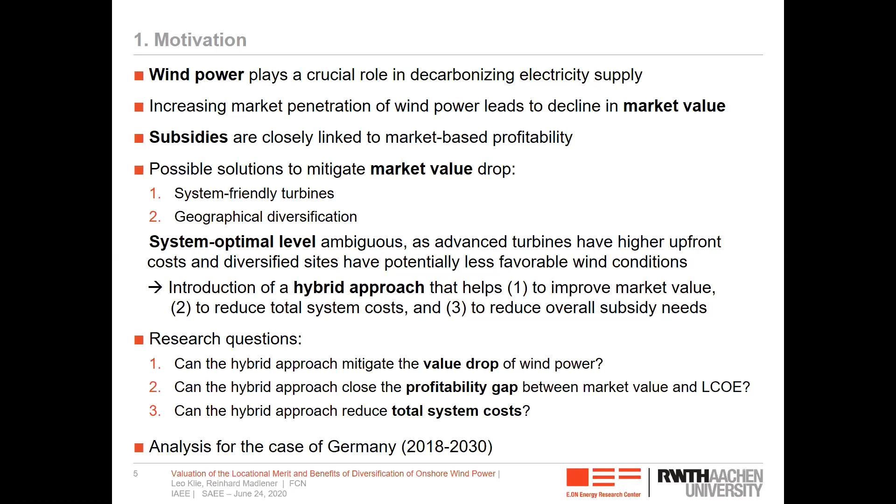We did the analysis for the case of Germany over a time horizon from 2018 to 2030. What's the advantageousness of the hybrid approach? Can this be expected to depend on both the country's wind and power system characteristics? Yes—so it's not just the wind conditions, it's the entire power system that needs to be modeled and understood.

There is a bunch of related literature. It has been growing over the last years, and I hope that some in the audience see their papers included. I did not have enough space to list them all, but in our article we made a detailed review of the current state of the art, identifying the gaps and also our original contribution to the literature.

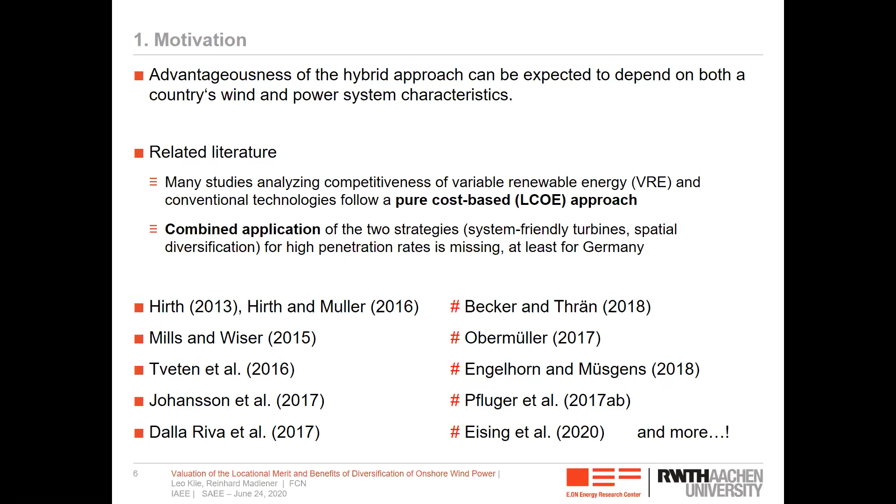Just two aspects: many of the studies we reviewed analyzed the competitiveness of variable renewable energies and conventional technologies by following just a cost-based or levelized cost of electricity approach. Others combined two strategies, system-friendly turbines and spatial diversification, but not at penetration rates as high as ours, since we look up to rates of 65%. For Germany, such a study was, in our view, missing so far.

Here is a map of Germany, or three of them, showing what we did. The first map shows the total system costs and market value development with high penetration rates of up to 65%—that's the goal of the German government for 2030 for the business-as-usual case, i.e. if we extrapolate recent trends into the future and see what happens.

We compare that with our hybrid strategy, where we take system-friendly technology into account and also geographic diversification. We split up the country into 38 regions—NUTS-2 classification regions—and then did a more detailed analysis on four regions that looked most promising in terms of geographical diversification.

We compare our outcome from the hybrid approach versus the business-as-usual scenario that we also determined. We look at the difference, BAU minus DIV for diversification, and we also checked some sensitivities and analyses in more isolation to check what additional benefit really comes from diversification and how much benefit we see from system-friendly turbine configurations.

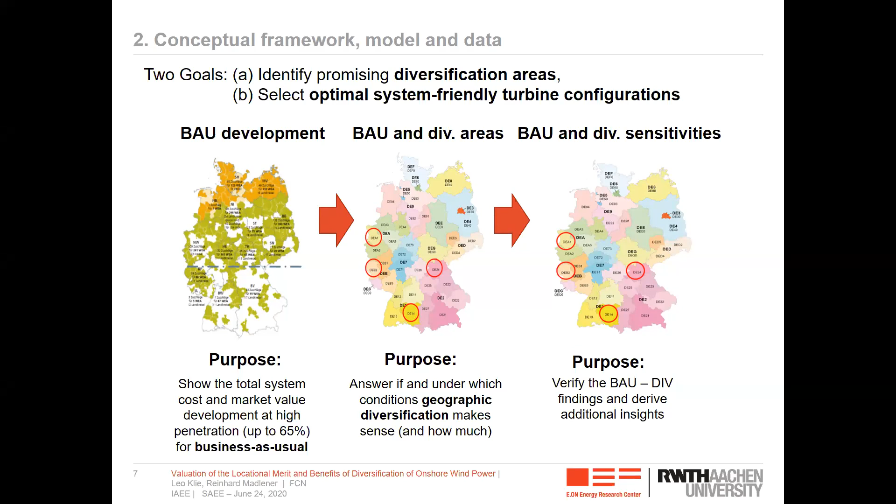Now this is an overview of the model architecture. In the middle you see EMMA, the electricity market model developed by Lion Hirth—and for most of you, Lion will be a well-known figure. This model is open source, so anybody could ask for permission to use it and modify it.

This model was used to derive the market values as well as the total system costs. As inputs, we had to deal with the configuration-specific costs, the region and configuration-specific energy model, and hourly wholesale electricity prices. We determined variance reduction potentials, the region and configuration-specific LCOE, and the region and configuration-specific market values.

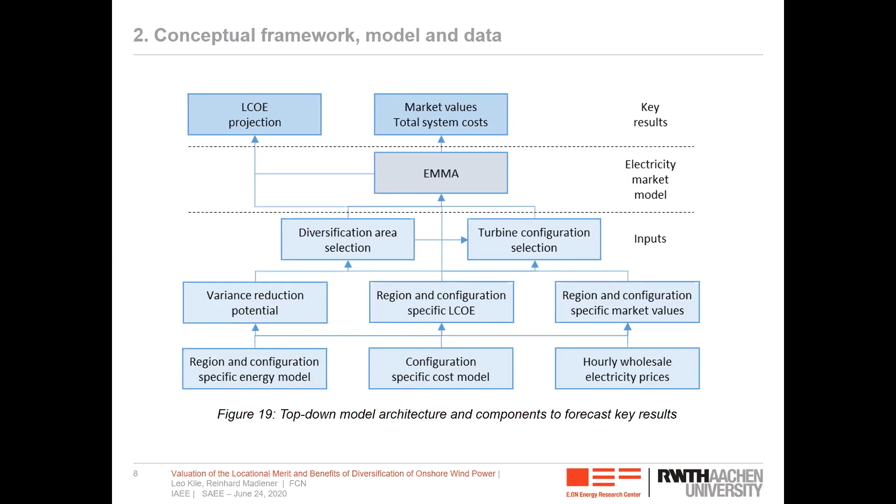These fed into the diversification area selection I showed you on the previous slide, and the turbine configuration selection, which was more of a technical exercise that I will come to in a minute.

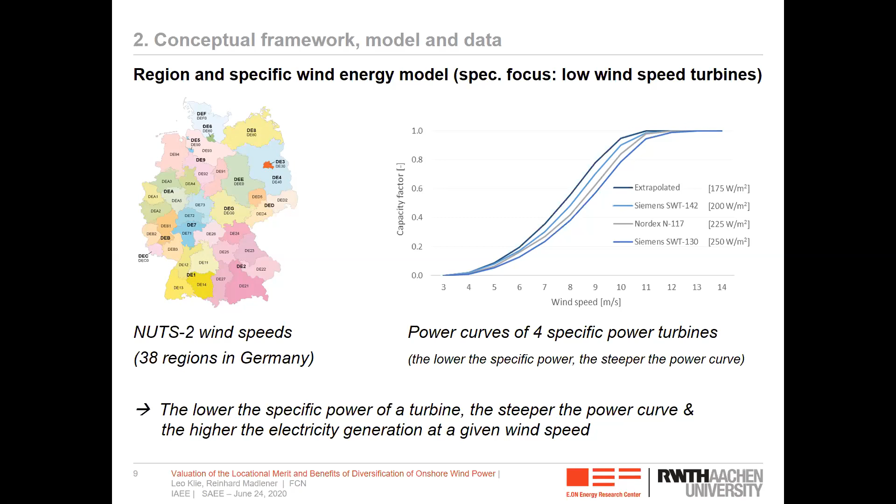Here on the right-hand side you see the power curves of four different specific-power turbines, which allowed us to decide which turbine technology to use in our analysis. For some turbines this curve is steeper, meaning they can have a higher capacity factor for the same wind speed. On the left-hand side, you see again the map of Germany with the 38 regions based on the NUTS 2 wind speed classification.

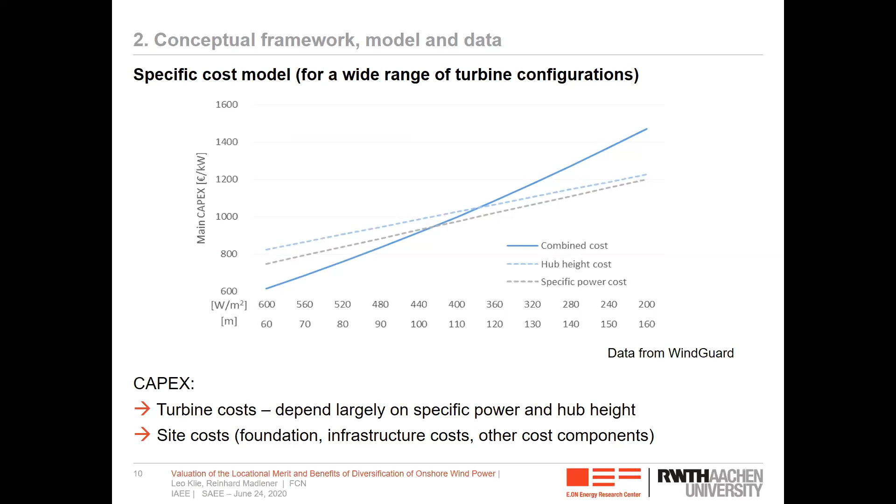Now, in terms of OPEX, CAPEX, capital expenditures and operating expenditures, we also had to look into this to do the cost analysis. You can see here for different hub heights and different specific power in watts per square meter that the cost increases as the turbine height or the specific power decreases. You can combine the two and get the solid blue line compared to the dashed lines. In terms of CAPEX, the turbine costs depend a lot on the specific power and hub height, so that's a major influencing factor.

But there are also site costs like foundation and infrastructure costs, and other cost components that need to be appropriately taken into account. Then we looked at the diversification area selection, and this is just a schematic diagram showing roughly how we did it. I don't have much time to go into details, but all these details are documented in the working paper.

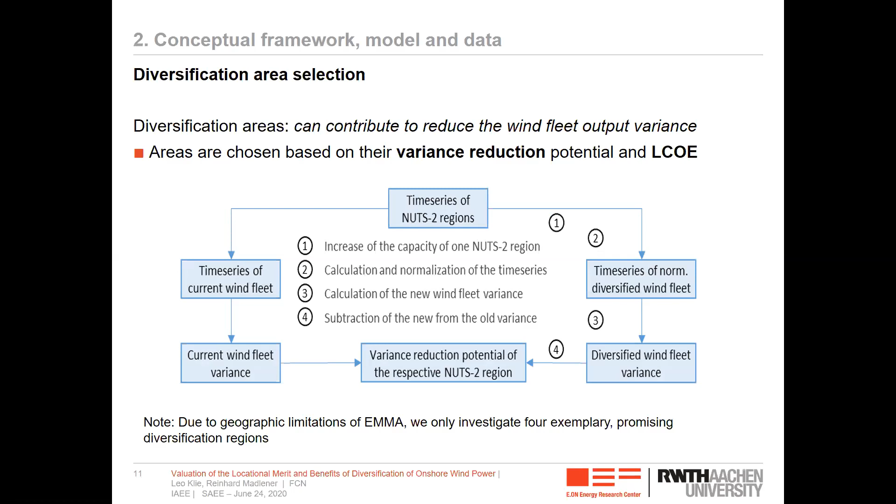Available next week. We chose the areas based not just on the variance reduction of the wind power output, but also on the levelized cost of electricity. Because of geographic limitations of EMMA, we only investigated 4 exemplary promising diversification regions in the end.

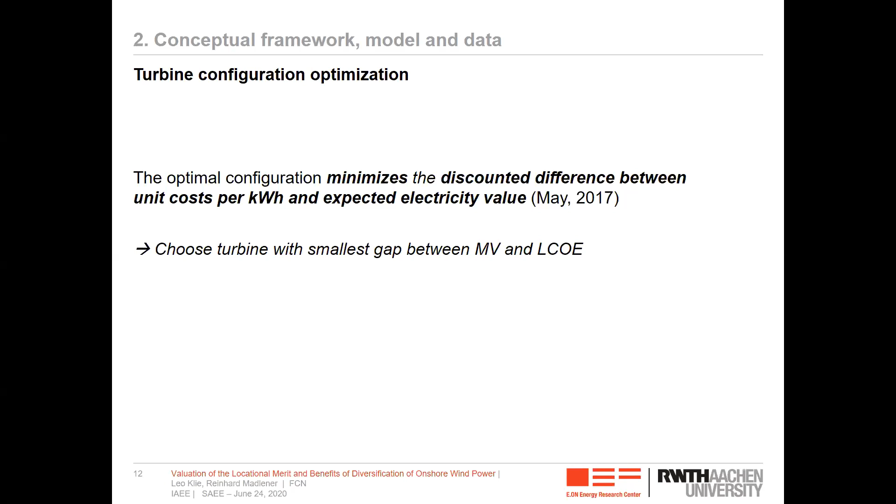Now, the turbine configuration optimization was based on the discounted difference between the unit cost per kilowatt hour and the expected electricity value, following also the work by May published in 2017. We look at turbines to be chosen with the smallest gap between market value and the levelized cost of electricity, kind of the most profitable ones.

Regarding the current and future wind fleets, we had to look into the benefits of our approach by assessing and comparing it with business-as-usual turbines. This is in terms of the wind power plants and turbines installed today, but also into the future up to 2030.

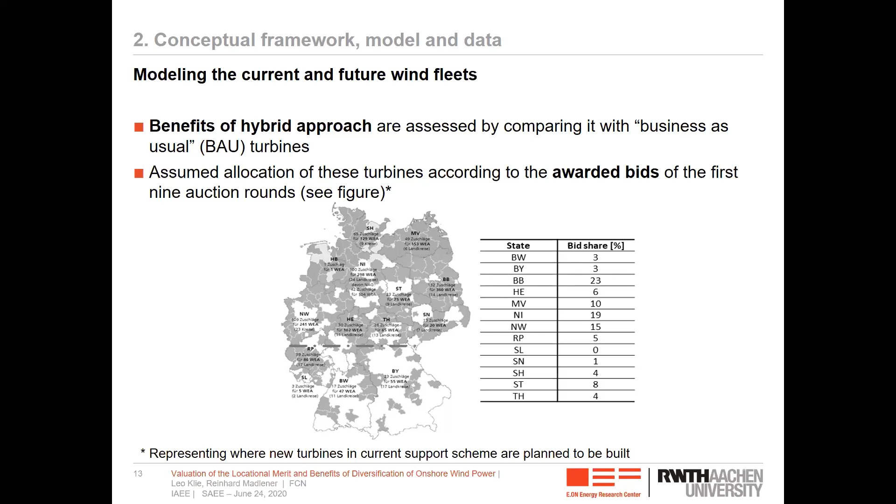The assumption was to allocate the turbines according to the awarded bids of the 9 auction rounds we had in the recent past. The idea is representing where the new turbines in the current support scheme under current market conditions are planned to be built, to be quite realistic about where the next turbines will be installed in the years to come.

Then we move on to the EMMA model, the European Electricity Market Model, which we adapted in several ways. For example, we included the 4 diversification regions I already showed on the map. We also implemented offshore wind technologies, and represented technologies for the future and current wind fleet, which was not in EMMA per se.

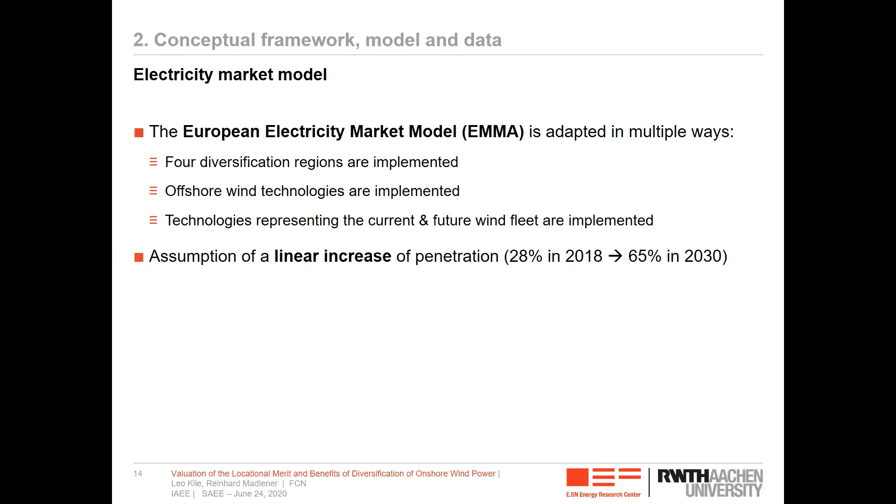There is an assumption of a linear increase of penetration from 28 to 65%. The linearity is an assumption that has an impact on the results, but we found this quite convenient and simple enough to use.

We also had some more data like the CO2 price, which you can see here, from 24 euros per ton up to 35 euros in 2030. Nuclear phase-out as decided in Germany until 2022. And the linear coal phase-out assumption until 2038, which is the law that says either by 2038 or maybe earlier, 2035, coal should be phased out in Germany.

Nuclear and coal phase-out has tremendous implications on the power supply and the market in Germany, so this all has to be appropriately taken into account. We also assumed some technical potential based on the literature for advanced wind turbines in Germany, and this comes up to 620 gigawatts overall.

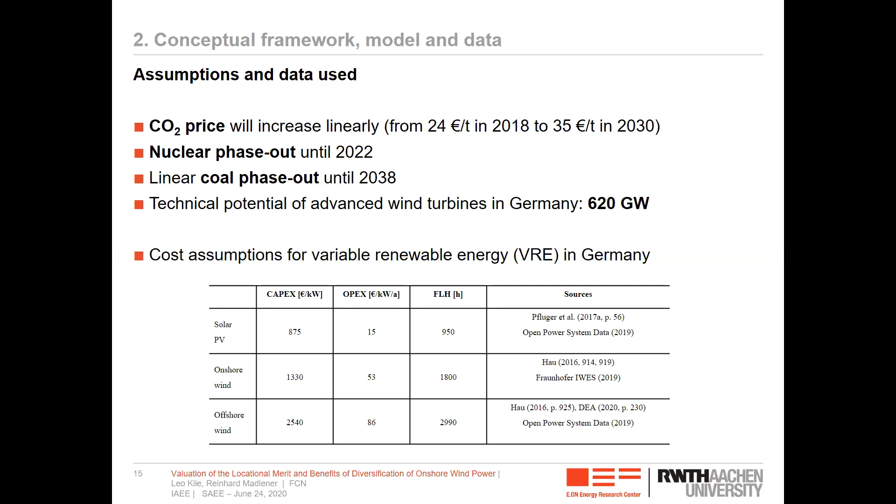For the cost assumptions, you see some sources at the bottom, but I'll skip that for now. Of course, you can also have the PowerPoint slides later made available from us.

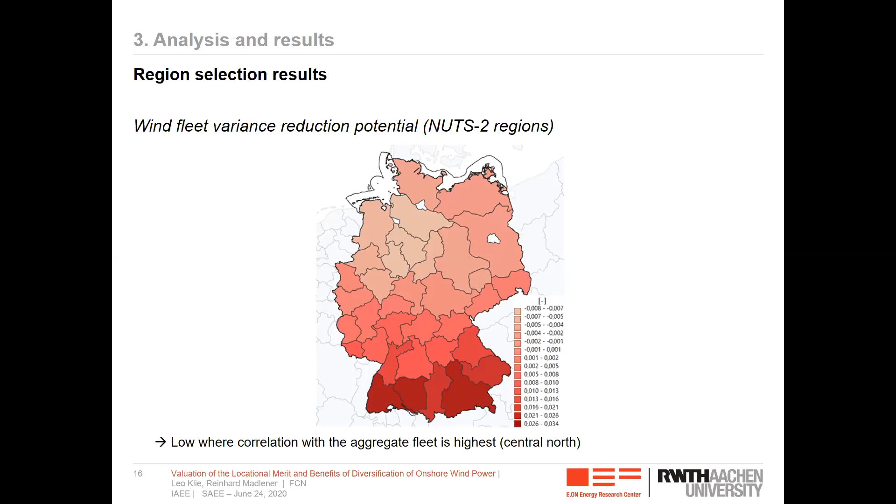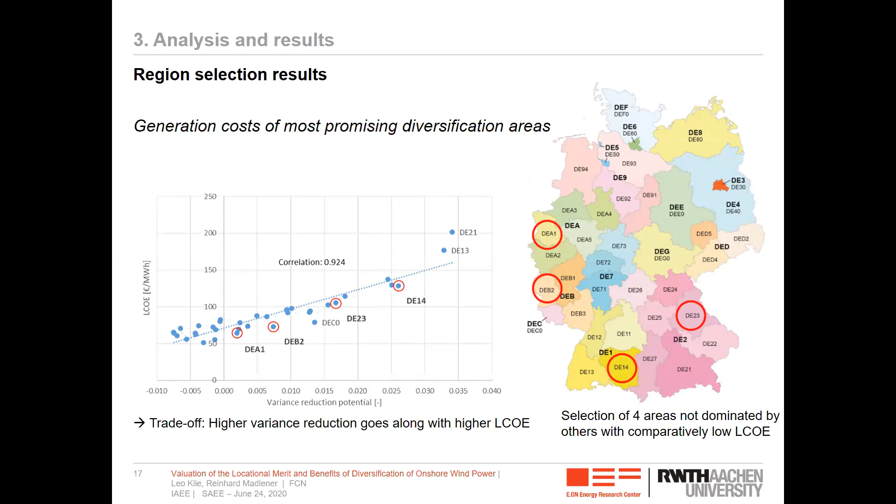Important to mention is also the trade-off: there is a trade-off between the higher variance reduction, which goes along with higher LCOE, as you can see from the left graph shown here. On the right-hand graph, you see again these 4 selected areas, which were the most promising ones in terms of diversification, but also with an eye on the LCOE.

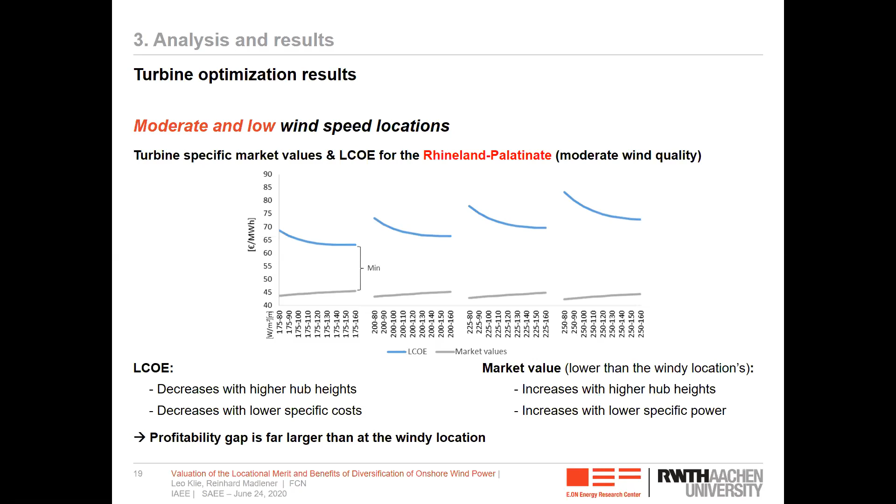Now, in comparison, this is the situation for moderate and low wind speed locations, for example in Rhineland-Palatinate, where we see, in contrast to the previous result, that LCOE decreases with higher hub heights. The other results are more or less the same as before: it decreases with lower specific power, whereas the market value increases with higher hub heights and also increases with lower specific power. You see the minimum shown in this slide: a hub height of 160 meters and a specific power of the turbine of 175 watts per square meter. And just to flip back again, the minimum there was for hub heights of 90 meters, again with a specific power of 175 watts per square meter.

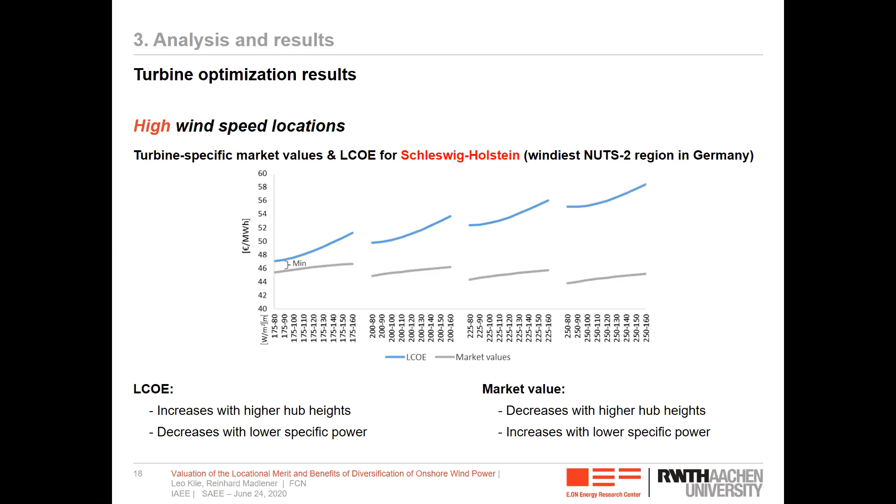For the conclusions from these optimal turbine configurations, we can say that lower specific power, which is system friendliness, is always better. Low hub heights are optimal for high wind speed locations, and high hub heights are better for moderate and low wind speed locations.

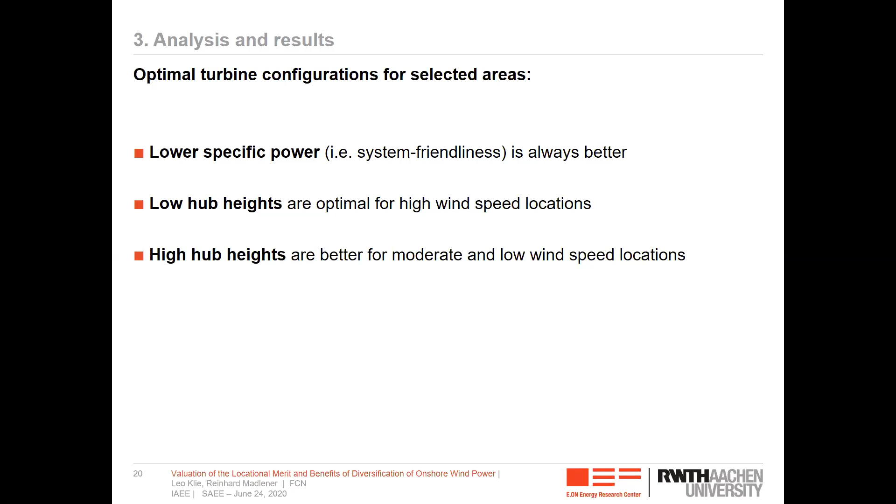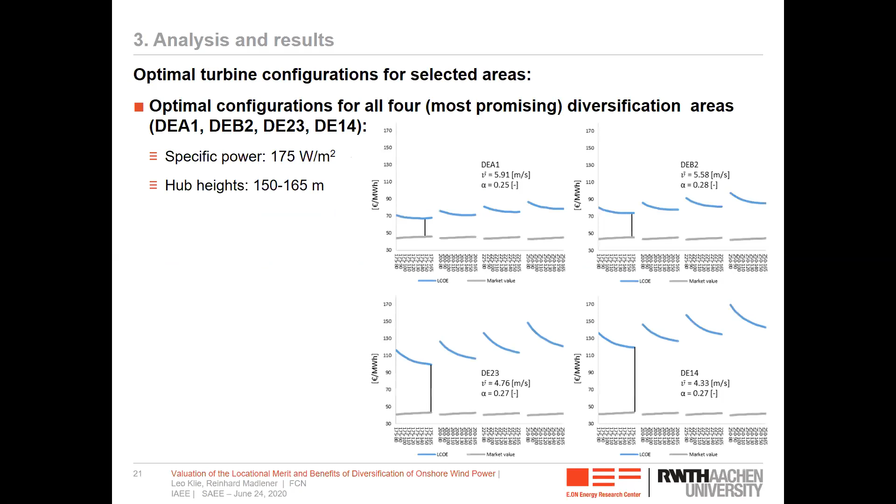Next I'll show you, for the 4 selected areas, the optimal configurations. It's a bit hard to see, especially since the numbers are small printed, but by and large we find the optimum for relatively low specific power and hub heights of about 150 to 165 meters.

Here you see the application of the hybrid approach and how much this really gives you in terms of the profitability gap. This can be most easily seen: there is a significant difference of about 0.75 billion euros per annum, which is equivalent to a 5% reduction in the overall subsidy needs compared to business as usual. We also find a reduction, so the hybrid approach really seems to be better, or slightly better, in most of these indicators that we looked at.

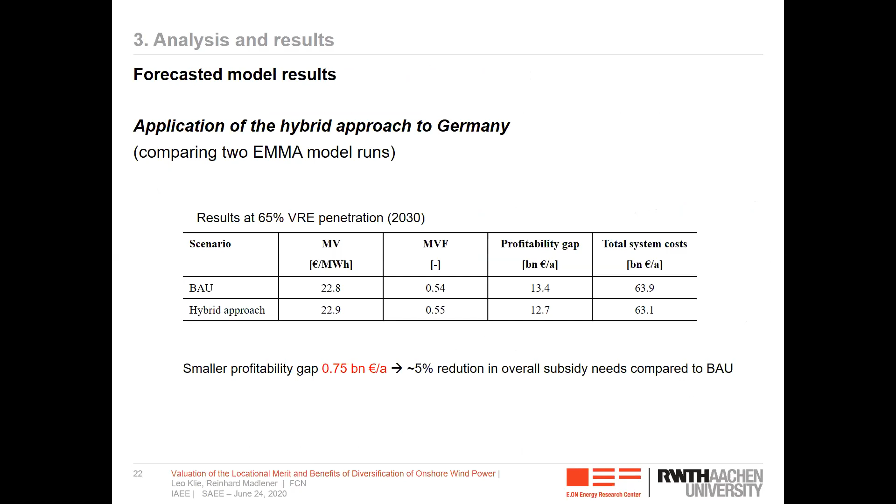Next, the market value. Using the hybrid approach, we get higher market values compared to the business-as-usual additions, as you can see from this slide. On the x-axis we have the increase in variable renewables, which also includes offshore wind and solar power. We do our analysis only for onshore wind, and we study this up to 65% renewables penetration. You can see the differences: 1 to 2 euros per megawatt hour at the 30% level of today, versus 2 to 7 euros per megawatt hour at the 65% level of penetration.

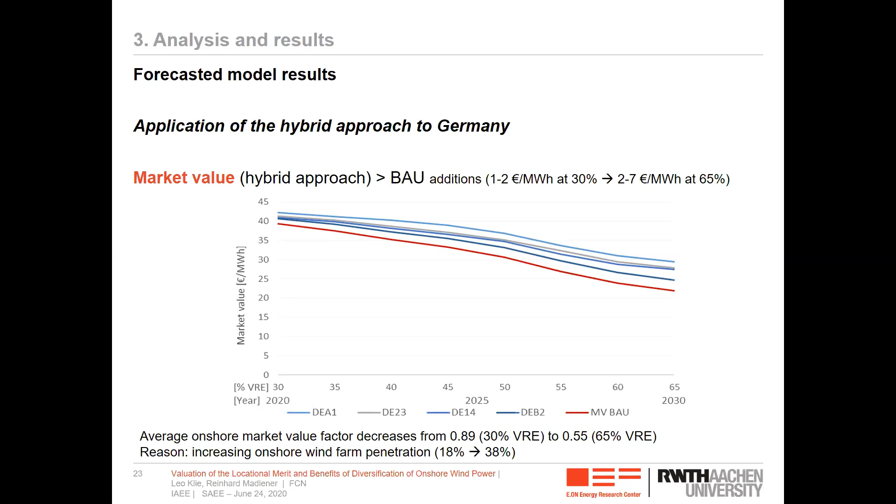One reason for this result is the increasing onshore wind farm penetration, which rises over the model horizon from 18% to 38%. In terms of profitability gaps for the hybrid approach, you can see the results here for the regions we covered versus business as usual. Some observations include that the profitability gap increases, and if we have... the reason is the decrease in the market value.

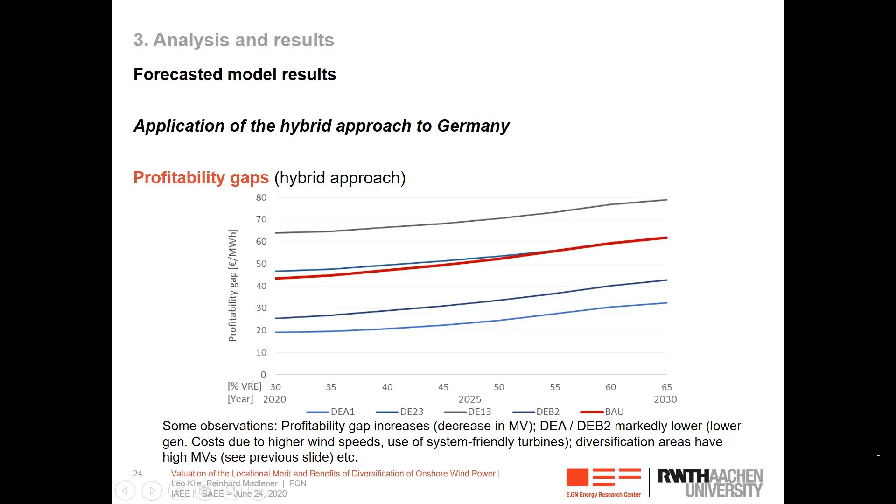We find that the two regions, DEA and DEB2, are markedly lower in terms of the profitability gap. The reason is that generation costs are lower because we have higher wind speeds in those two regions versus the other two regions covered, but also there's a higher use of system-friendly turbines in those two regions. The diversification areas have high market values, which was already evident from the previous slide.

Next, the profitability gaps for DEA1 region, at various penetration rates plus learning rates. So we also look at different learning rates, shown at the bottom from 0 to 60%. At some point there is a learning rate level where the profitability gap becomes actually wider or higher, versus the other situation where we are able to reduce the profitability gap. So learning plays a big role, but so does the penetration of renewables over time.

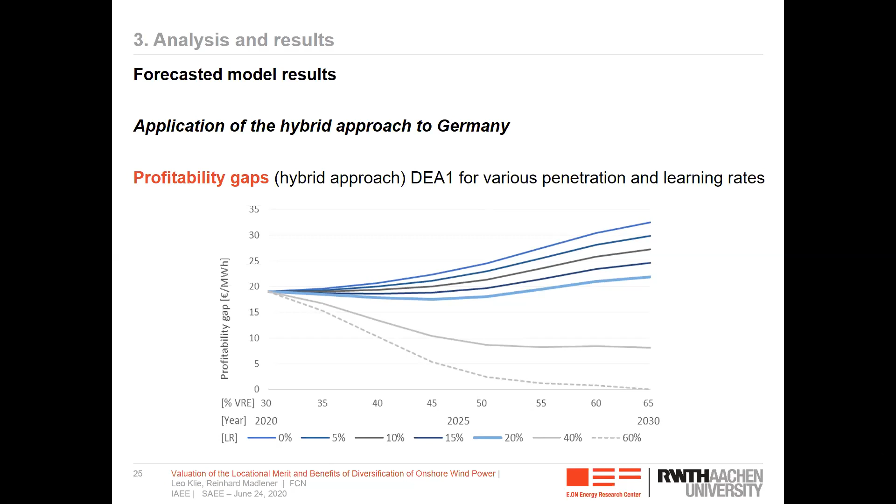That's why the benefit doesn't continue like that. Over the model period, the total systems costs of the hybrid approach model are definitely lower than for the business as usual. The cost reductions increase steeply up to 40% and then decline after that in percentage. But in absolute terms, it slightly increases further all the way to 65%.

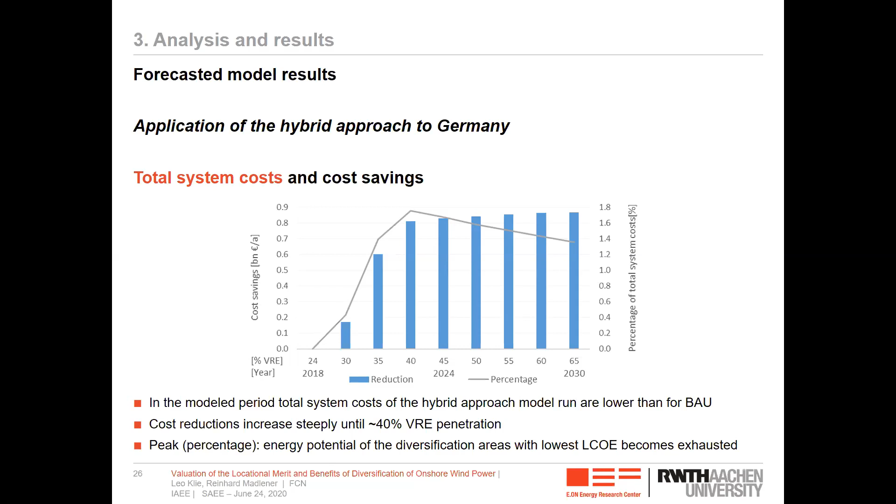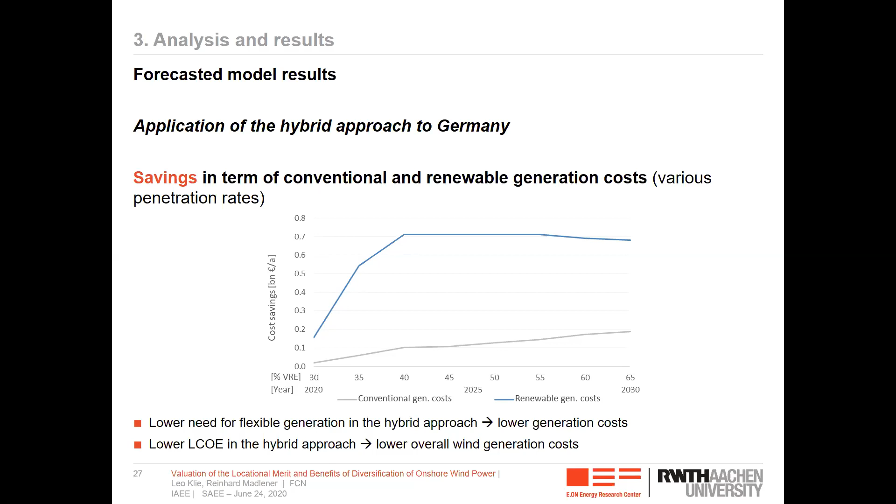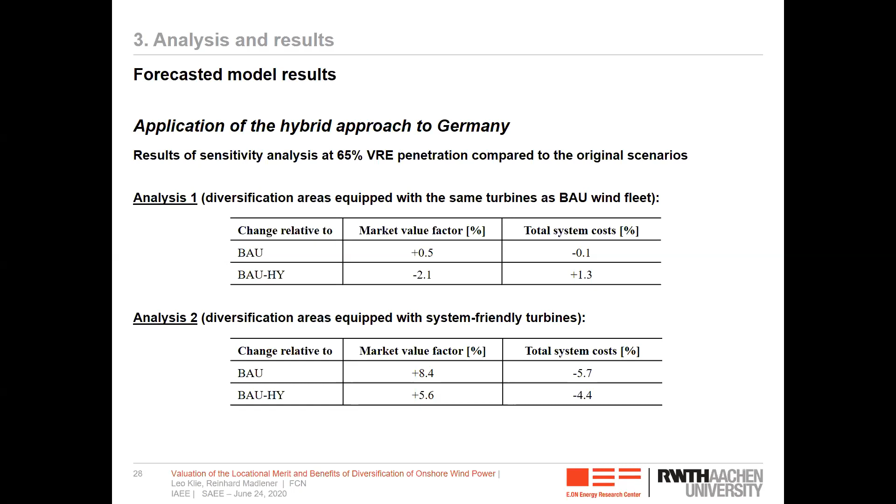To compare some sensitivity analysis we did between the business as usual and business as usual with the hybrid approach combined, we can see that this doesn't lead to much improvement as we would expect. But here we try to single out the diversification effect per se, and we find that this is really not the big story. It's more the system-friendly turbines.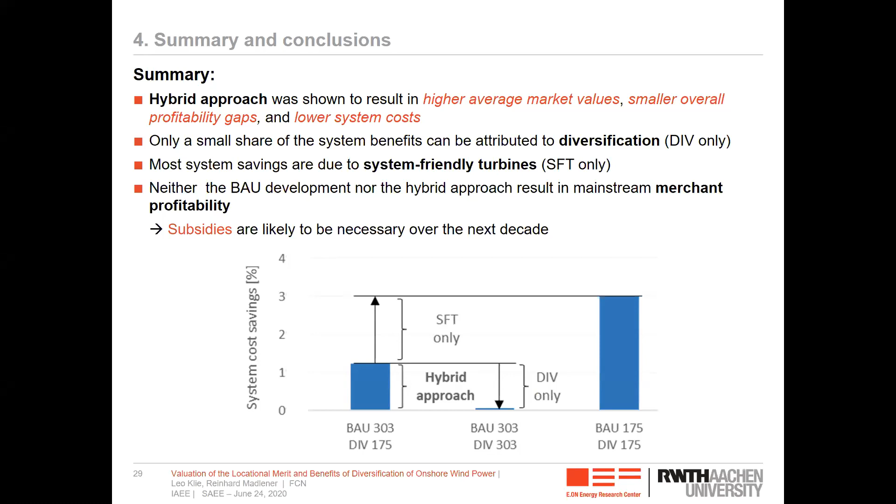And neither the business as usual development nor the hybrid approach result in mainstream merchant profitability, which means subsidies are likely to be necessary for the foreseeable future. Diversification is not the main issue, but system-friendly turbines should definitely be taken into consideration.

To conclude, for the selected diversification areas, if equipped with system-friendly turbines, the market value drop is less severe. You can read the numbers yourself. The profitability gap, i.e. the subsidy need, in diversification areas increases more slowly, and the total system costs decrease by about 0.85 billion euros per year, or 1.4% of the total system costs at a 65% renewables penetration.

A large share of the benefits is attributed to system-friendly turbines and a low share to geographical diversification. The profitability, measured by market value minus levelized cost of electricity, can be increased by system-friendly turbines at both the current and the future penetration rates. Some diversified locations can become increasingly profitable at higher penetration rates.

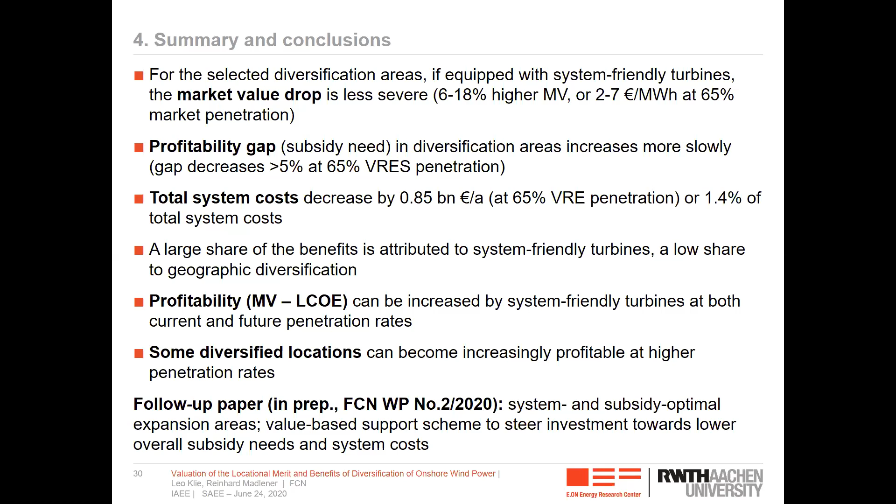And last but not least, I point out the follow-up paper that is currently under preparation, where we also want to look at the system and subsidy optimal expansion areas, and a value-based support scheme that could actually steer investment towards lower overall subsidy needs and system costs. Well, that concludes my presentation. Thank you for your attention. If you have any questions, I will look now into the question and answer section. As I said, this paper will be available sometime next week.

So I see 3 questions there. How do you treat exports and curtailment? I'm sure some of these questions I cannot answer you right away. David, I'm sorry, I will have to check to be sure. But this was not a specific element. So I take it either we did it as it is done in EMA. We did not change anything to that, but I need to check how exactly it is done in EMA.

The second question, the obvious question this presentation raises is transmission costs. Yes, we also looked at those. I don't have the figure at hand, but they can be found in the paper. As we looked at all the different costs to balance off this volatility in supply, the cost savings in terms of transmission costs were actually accounted for.

And hang on, the third question: does the modeling cover the transmission and distribution of electricity? What software was used in the sensitivity analysis? That question I cannot answer right away. For the sensitivity analysis, we more or less made some changes, as I explained, with this isolation of the diversification to see whether and how the results change. But otherwise, software-wise, I need to really consult Leo to make sure I give you the proper answer.

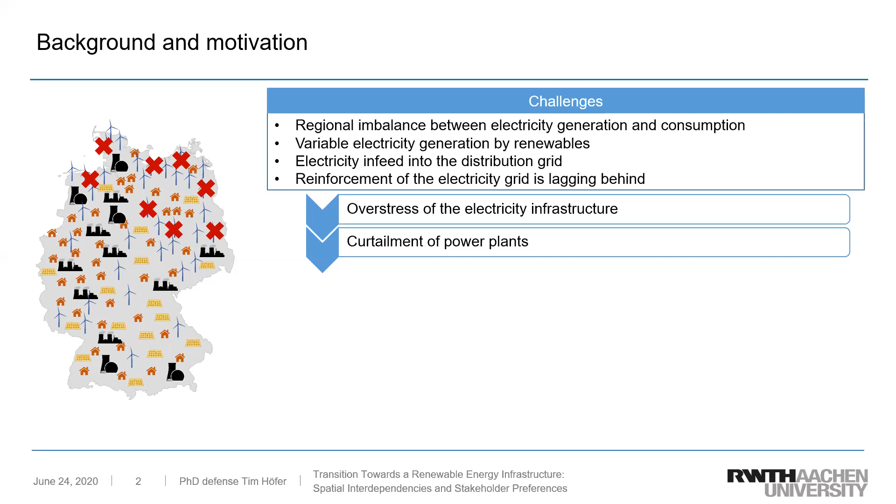So in the short term, to resolve this overstress, the system operators curtail power plants. In the first step, they curtail conventional power plants, but if this is not enough, they have to reduce the output of renewable power plants as well.

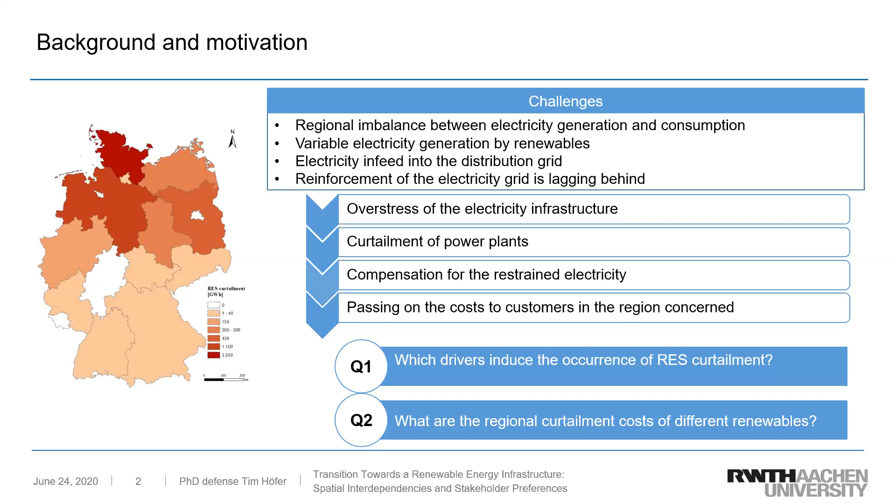First, which drivers induce the occurrence of RES curtailment, so the reduction of the output of renewables? And what are the regional curtailment costs of different renewables?

So as I mentioned, this study focuses on Germany. And within Germany, we selected four distribution system operators, which cover approximately 40% of the German area and are responsible for the majority of RES curtailment. These distribution system operators have different characteristics, like they feature wind-dominated, PV-dominated, or low-load regions. And we analyzed three years from 2015 to 2017.

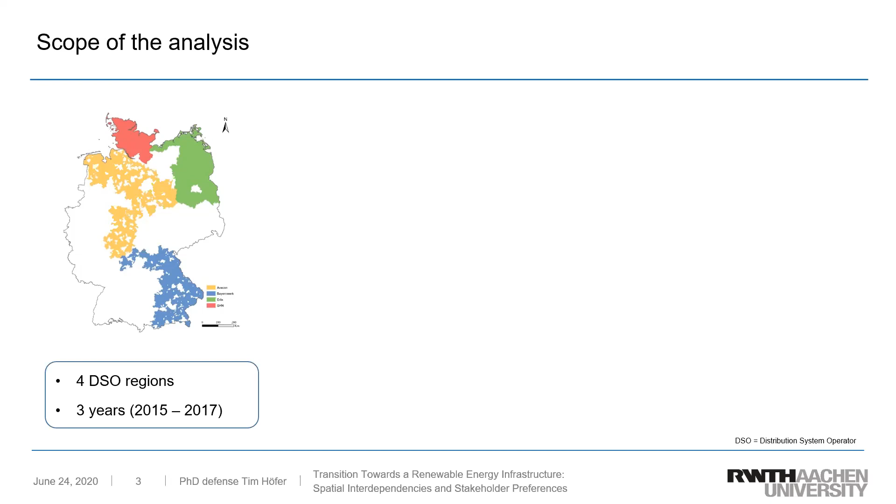And then to further refine our analysis, we divided the distribution system operator regions into smaller subregions. We did that with a Voronoi tessellation. In a Voronoi tessellation, polygons are created around seeds, and then the points, for example the power plants, are allocated to the closest polygon.

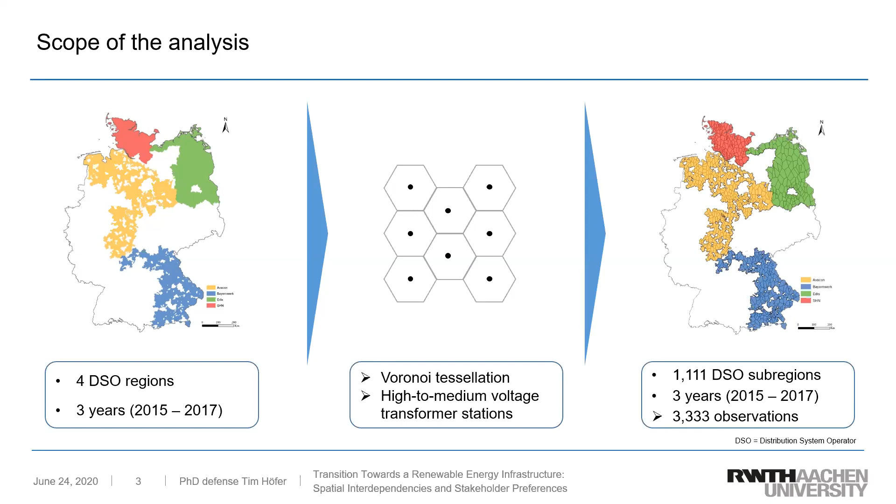And as seeds, we use the high to medium voltage level transformer stations. So with this, we get 1,111 DSO subregions within these 4 DSO regions. We cover 3 years, so this yields a spatial panel data set of 3,333 observations.

For our regression analysis, we use a 2-step Heckit sample selection model. The first step is the so-called selection equation, and the second step is the output equation. The selection equation is a probit model which corrects bias from non-randomly selected samples.

Here the dependent variable, the RES curtailment costs, is binary - either a curtailment occurred in a year and in a DSO subregion or not. All subregions, all 1,111 subregions, are considered. This selection equation analyzes the impact of renewables on the probability of occurrence of RES curtailment.

To connect step 1 and step 2, we calculate the inverse Mills ratio and include it in the second step, to cover the bias from the non-randomly selected samples.

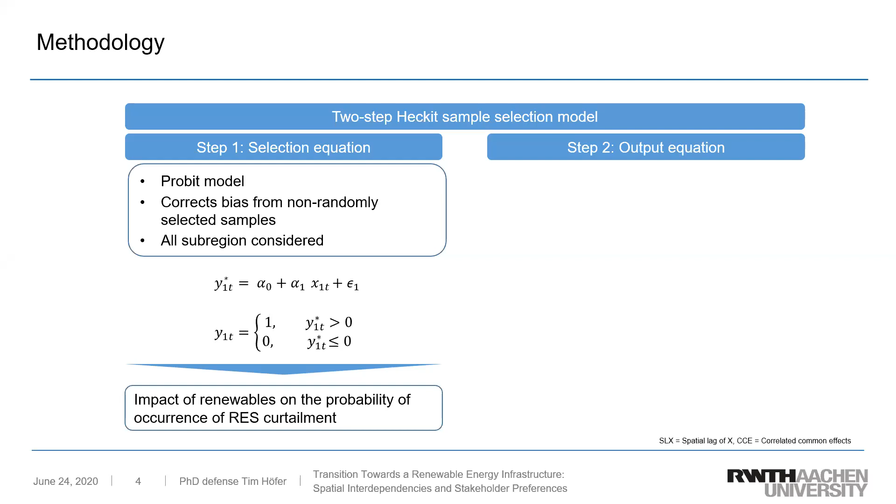The second step is a spatial econometric model, which captures cross-sectional dependence between neighboring regions. In this equation, we only consider those subregions which experienced curtailment of renewables in the 3 consecutive years from 2015 to 2017. In this linear regression, we included 2 different kinds of spatial models.

The first is the so-called spatial lag of X model. This model analyzes the impact of the explanatory variables on neighboring regions. And the common correlated effects model here is inserted in the error term and captures the cross-sectional dependence by cross-sectional averages across the subregions. With this spatial econometric model, we analyze the impacts of renewables on RES curtailment costs.

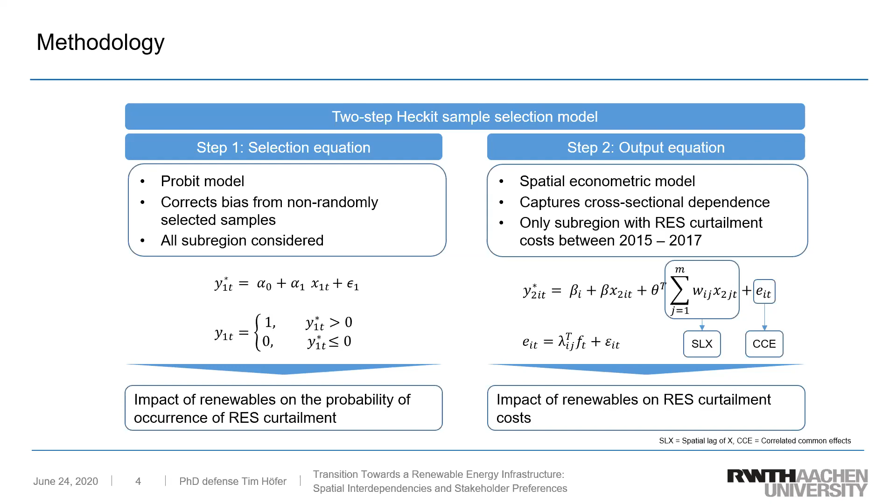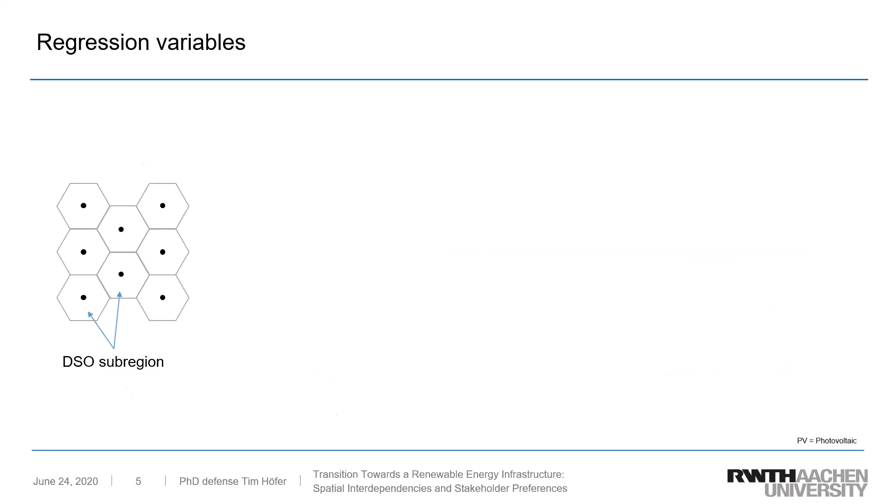For our regression analysis, we allocate all variables to the DSO subregions. Our dependent variable is the curtailment costs measured in euros. Then we have power plants like wind energy, PV system, bioenergy, hydro energy, and conventional power plants. But we only consider those power plants that are connected to the distribution grid.

And we analyze 2 different models. In the first model, we use the installed capacity of these power plants to explain the curtailment costs. And in the second model, we use the generated electricity to explain the curtailment costs.

Further explanatory variables are the load of a DSO subregion, the average wind speed, and then 2 dummy variables. The first is the distribution system operator responsible for the subregion, and then the year in which the curtailment costs or the curtailment occurred.

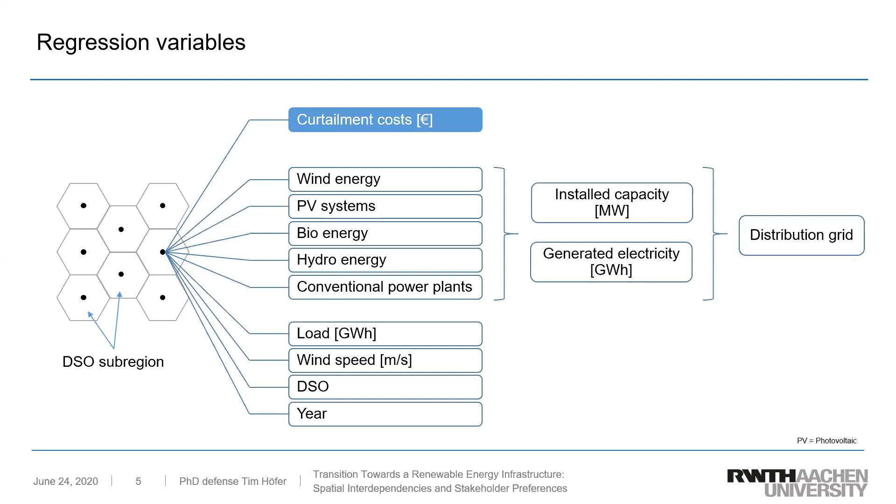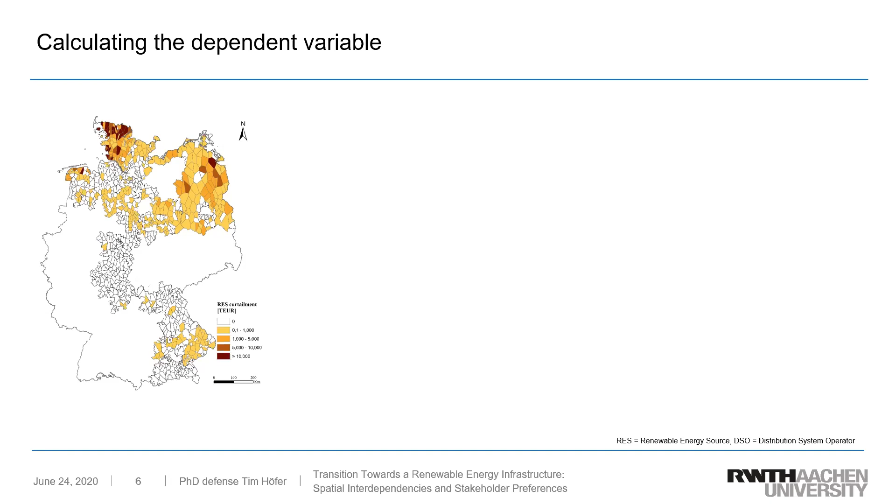Our dependent variable, the cost for curtailing renewable energy sources, is not publicly available, so we had to calculate this dependent variable ourselves. We did this in 3 steps.

The first step is to calculate the potential hourly output of renewables during the curtailment measure. So we used the MERRA-2 data of NASA, which publishes hourly wind speeds or solar irradiation, and use it to calculate the variable output of wind turbines or photovoltaic systems, for example.

Then the second step is to compute the reduced power output of renewables stemming from the curtailment measure. So if an overstress occurs, the system operator can choose to reduce the output of renewables to 60, 30, or 0% of the nameplate capacity. The potential output minus the reduction stage yields the reduced power output.

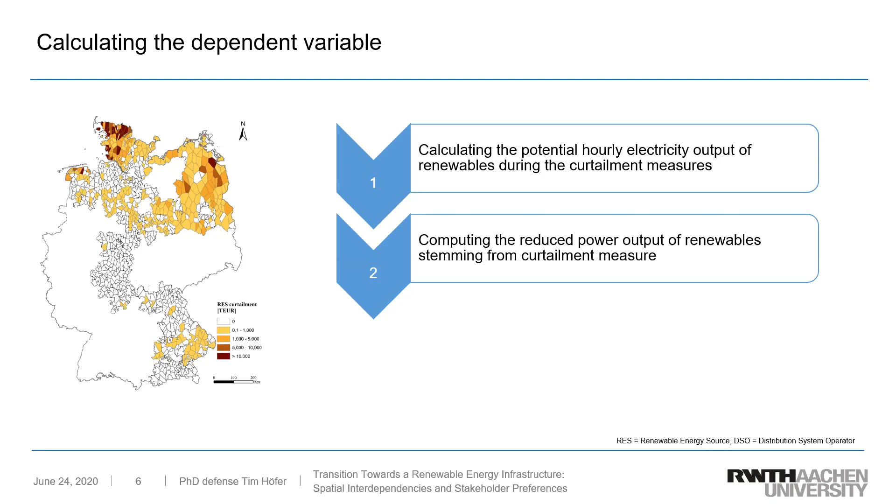Finally, we calculate the RES curtailment costs in the subregions by multiplying the reduced power output with the remuneration tariff of the renewable, and then summing all the costs up for the respective DSO subregions.

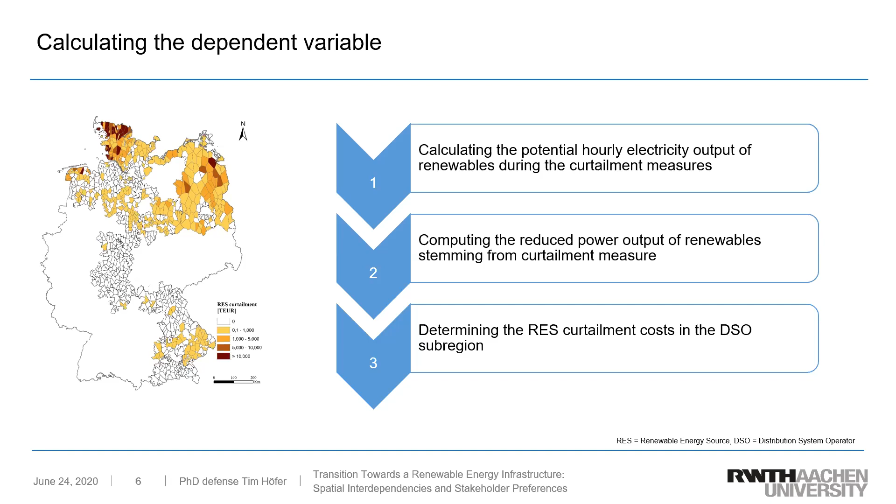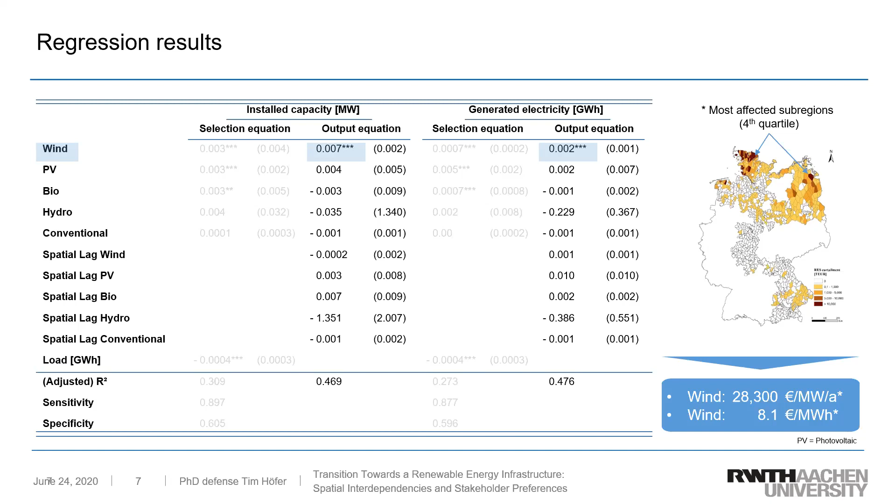We calculated how much an increase of 0.7% per megawatt or 0.2% per gigawatt hour would mean. As a result, we calculate that an additional installed capacity of wind energy increases the curtailment costs in a DSO subregion by 28,300 euros a year, approximately 2% of the installation costs of an average wind turbine. Furthermore, another megawatt hour of generated electricity induces costs of approximately 8.1 euros per megawatt hour, approximately 9% of an average remuneration tariff for wind turbines.

In this article, we investigated the impacts of implementing renewables into an inflexible energy system, and analyzed the regionally varying costs of curtailing renewables to stabilize the electricity infrastructure.

As a result, we first see that most distribution system operating subregions do not experience curtailment to a large extent. In fact, only 223 subregions experienced curtailment in the 3 years from 2015 to 2017.

But especially in northern and eastern Germany, reducing the output of wind turbines induces high costs. Our recommendation from this analysis is to set regionally varying price signals for renewables, like grid use charges or grid installation charges. The other possibility would be to set incentives for flexibility options, such as battery storage or electrolyzers to produce hydrogen, or power to heat or power to gas applications.

With this, I would like to finish the presentation, and I thank you for your attention.